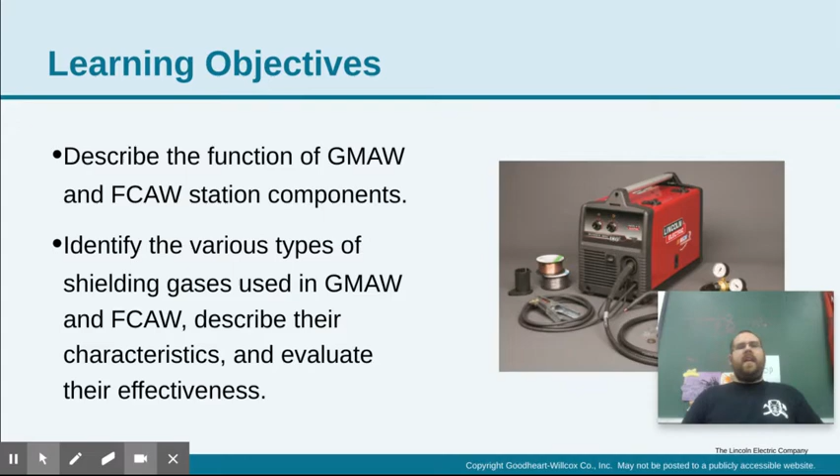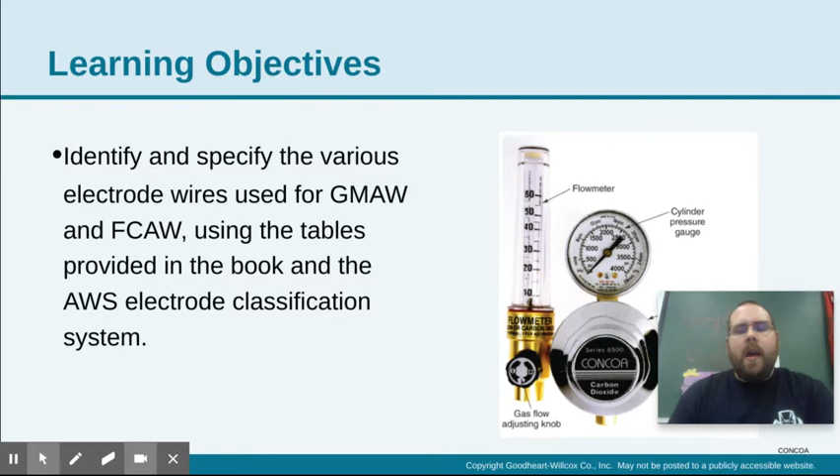Identify and specify the various electrode wires used for MIG and flux core using the tables provided in the book. It's a lot similar to stick welding, so it follows the same kind of 4-digit dash digit tables. Not really charts, but the same tables. I don't know why they have a flow meter on that page.

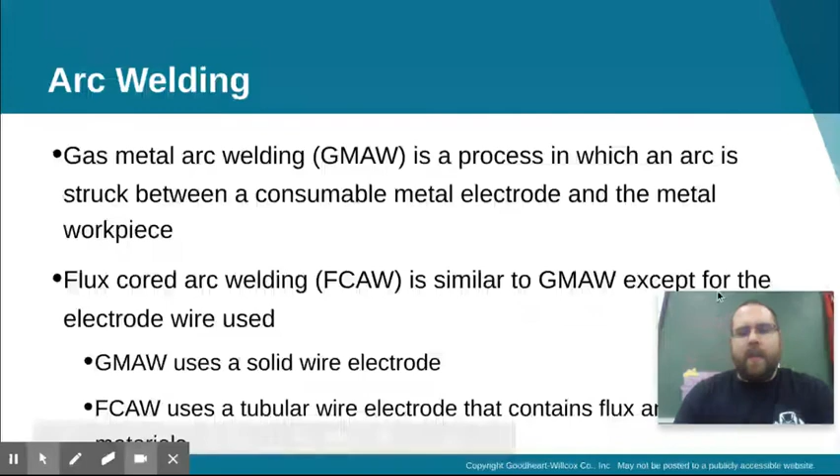Okay, so arc welding. Gas metal arc welding, or metal inert gas, MIG, is a process in which an arc is struck between a consumable metal electrode and the metal workpiece. Flux core is the same, except instead of a solid wire, the flux core wire is hollow, like a tube with flux in the middle, basically the reverse of a stick electrode. Stick electrodes have the wire on the inside, covered with flux. Flux core arc welding is the electrode with flux on the inside. I personally really like to flux core weld, that's just me. It's easy.

MIG welding and flux core both use continuously fed wires, so as soon as you strike an arc and hold down that trigger, it starts welding. The wire is the electrode. That should be pretty obvious.

Give me just one second, I don't know if I can get rid of this camera. Oh, I can kind of drag that up there. Okay, that's out of the way. Alt-T. Cool, okay, sorry, I had a bunch of pop-ups blocking my way. Come on, go away, slide. Go away, what does this do? Okay, so I can go back.

So the wire is the electrode. Flux core arc process is used to weld only ferrous metals and nickel-based alloys, so you can't do stainless steel or aluminum with flux core, and it is generally performed semi-automatically, and can also be done with a machine, usually it's just handheld but it can also be used with machine. You've got to read the book a little bit more on flux core, so it's possible, but it's harder to set it up on a robot to do it.

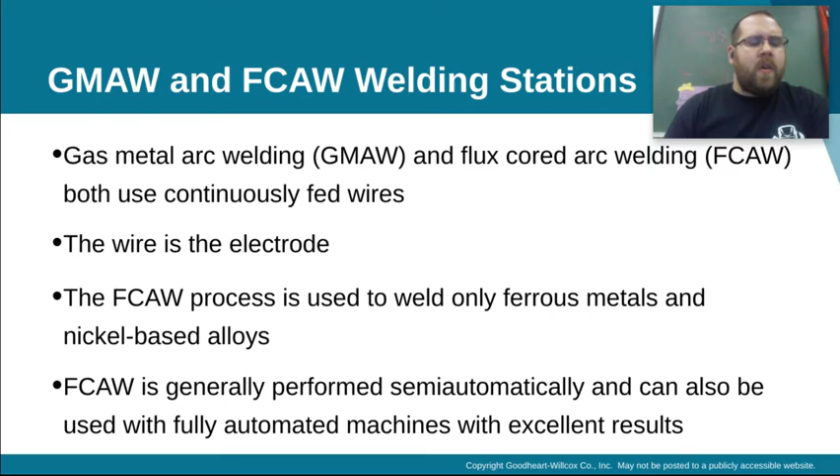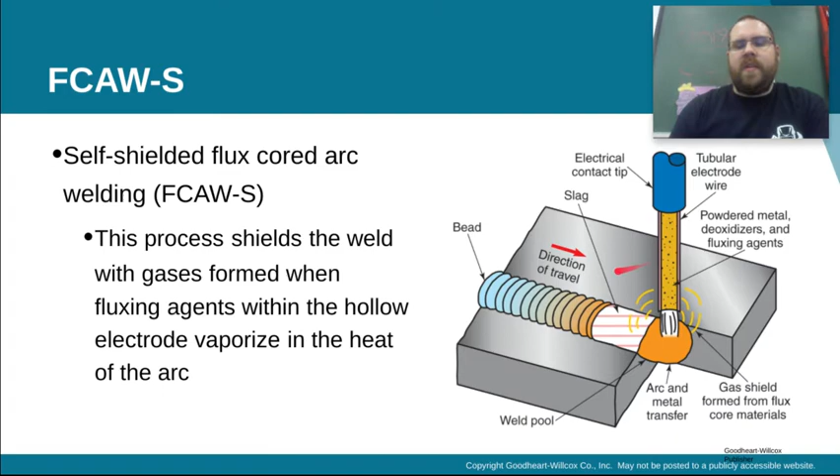Here you can kind of see a diagram of the flux core wire, so you'll have the wire on the outside and the powder flux on the inside. Granted, it's packed in there pretty tight, so it's not really a powder. This is for self-shielded, so if it's FCAW-S, that means it's self-shielded, it doesn't need a gas for it. They're a little bit nastier, a lot thicker smoke, stuff like that.

FCAW-G is for gas shielded. It's a little bit different, but it's still FluxCore.

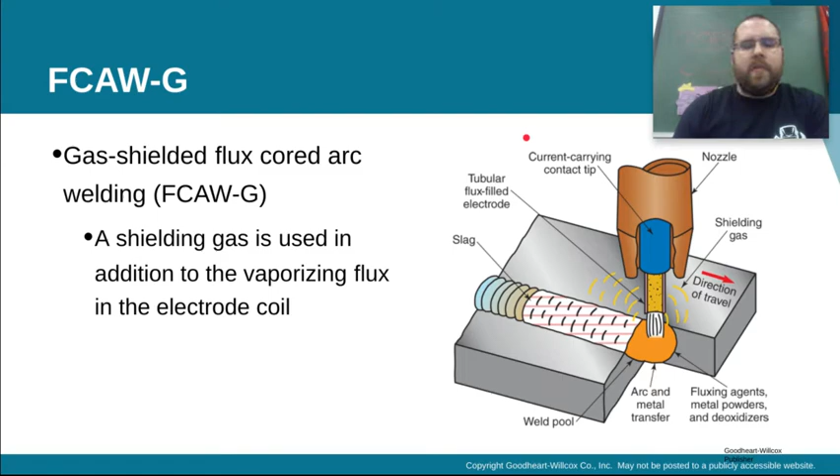The advantages for self-shielded are you can use it more outside, you don't have to carry around a bottle, and it does pretty well in out of position welding. There's higher weld spatter and higher levels of smoke, slag is much harder to remove, and it has a lower deposition rate, so you don't get as much weld in the same amount of weld area as you would with gas covered.

For the gas covered, it's used more often indoors, where you can lug around a gas bottle a little bit easier. The shielding gas keeps oxygen and nitrogen away from the weld, so you have a lot fewer weld defects like porosity, wormholes, or worm tracks. It produces a weld with good mechanical properties, so it's a little bit stronger and more suited for structural welding. It produces far less spatter, and you have a higher deposition rate, so you can put a lot more weld down a lot faster.

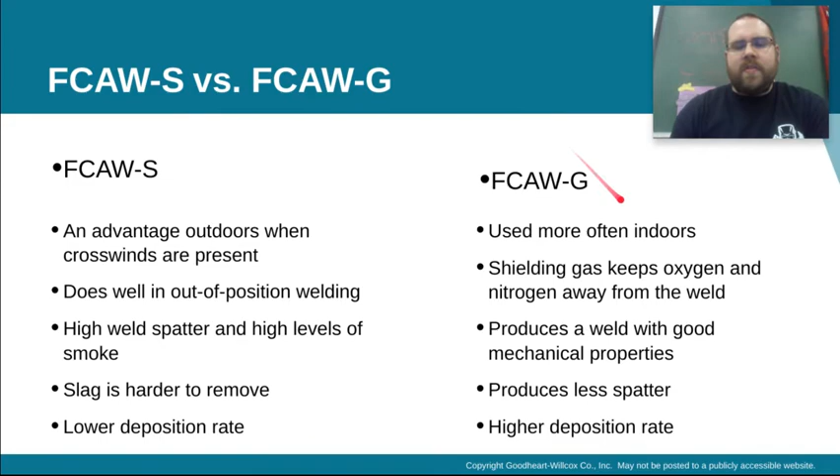I'm having a brain fart... wire rollers. I couldn't think of the rollers.

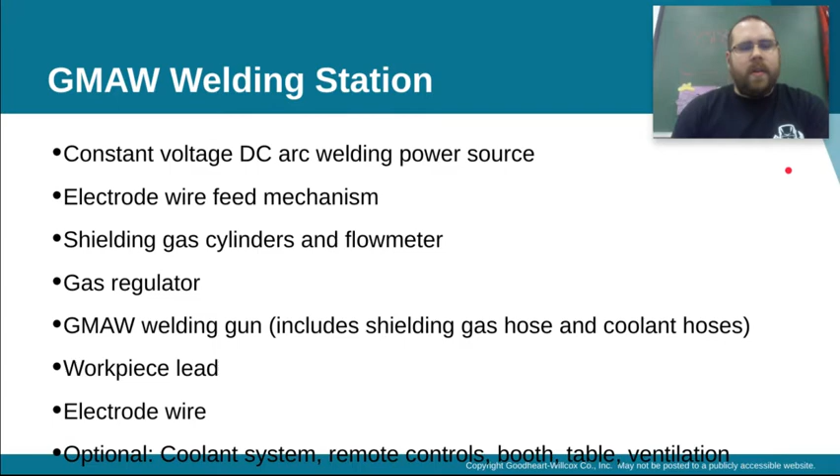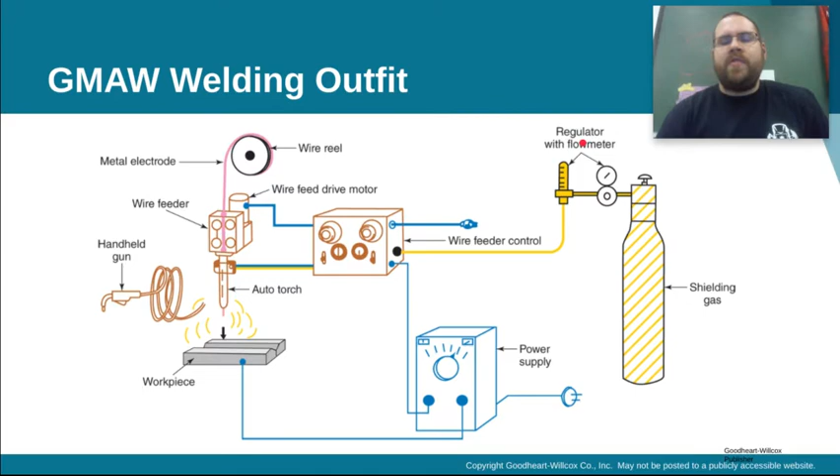You'll have a regulator and a flow meter. The regulator just sets the pressure that the gas is going in at, and the flow meter controls the volume of gas pushed through your gun. That's really important right there, it's the volume of gas flow, not the pressure that's fed out. When you're setting a flow meter, it's always measured like cubic feet per hour, or minute, I'm pretty sure it's hour. So the flow meter controls volume, and the regulator controls pressure.

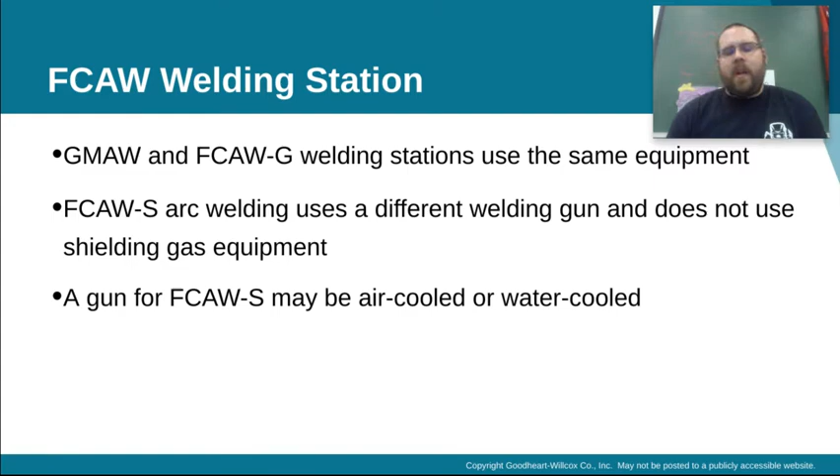That's more into the electrical side of things, which I'm not gonna lie, I don't know a whole lot about the science behind the machines. I just know how to use them. That's something I'm working with Bob, the Ivy Tech guy, to help learn more about. Usually, most places, if your machine has an issue, they bring in a maintenance guy, or they have a maintenance guy that fixes it. So I don't really know a whole lot about those machines when it comes to the electrical side of them.

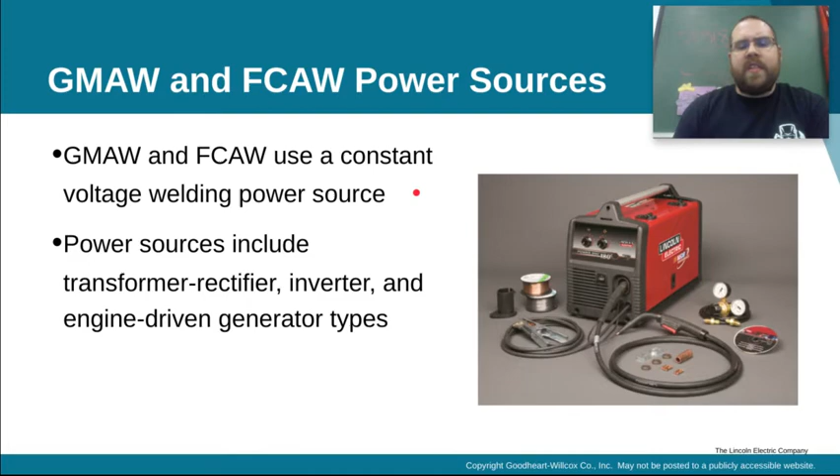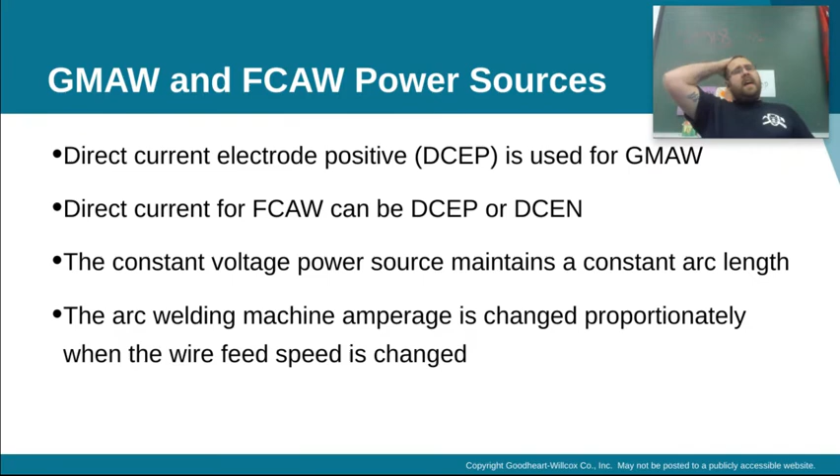Direct current electrode positive, DCEP, is used for MIG welding. Like I said in my MIG welding machine video, 90 to 99% of MIG welding and flux core is going to use direct current electrode positive. The only things I know that use something else are self-shielded flux core, which uses negative, and aluminum MIG welding, which uses AC. Off the top of my head, that's the only things I know that are different.

Spray, globular transfer, and short circuit transfer all use positive. The constant voltage power source maintains a constant arc length, so when you're welding, it keeps the same arc length all the way across.

Arc welding machine amperage is changed proportionately when the wire feed speed is changed. I actually don't know a whole lot about the amperage, but I know for 045 wire, when you're using MIG welding short circuit, 045 is a 1-to-1 ratio. So if you have your wire speed set at 275, your amperage is 275. And I think 035 wire is like 2/3 of that. I'll cover that more when we get into actual welding. I've got to look into it more, if there's a diagram or chart to use on how to find your amperage.

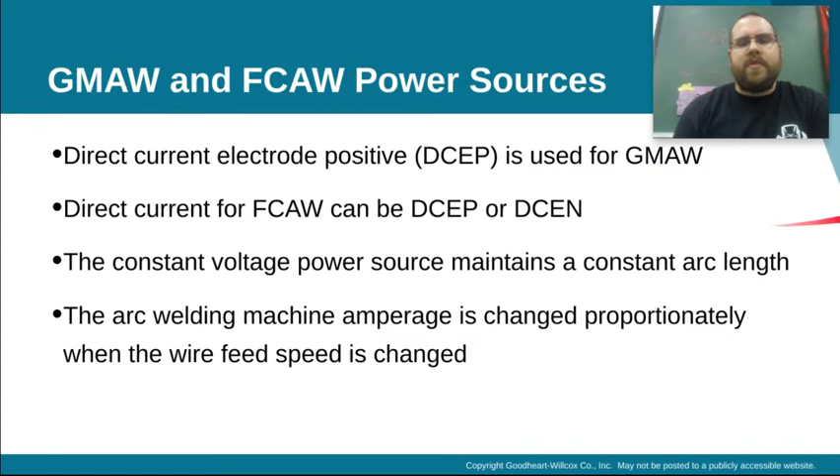For MIG welding and flux core, you'll set the volts and the wire speed, and that sets your amperage. I don't know anything more about that.

The wire electrode used in MIG welding comes in large coils or drums that contain hundreds or thousands of feet of wire. Here we'll use 44-pound spools. It takes a whole lot of welding to go through one of those spools of wire. If you're running a machine, you can get 55-gallon drums of coiled wire, so there'll be miles of wire in that drum.

Wire feeders may be contained inside the gas metal arc welding machine or separate from it. Some will have a panel that you lift up from the side, put the wire on, close the panel, and continue going. I like those a little bit better because it keeps your wire cleaner. All the machines we have here have it located on top, on the outside, so they do get a little bit dusty.

They also make these red Scotch-Brite things that you pop on your wire when it's going into your wire feeding machine that will scrub it clean. I'm trying to get some of those. I'm sure it would help with the welding a little bit better.

Wire feeds consist of the coil mounting device, a set of drive wheels for the wire, and an adjustable constant speed motor. You can kind of see it on the video again - we have the mounting device where the spool is actually mounted, the drive rollers or wheels, and what I called a tension setter, which is the adjustable constant speed motor. That's just how fast it's running or how much tension those rollers put on the wire.

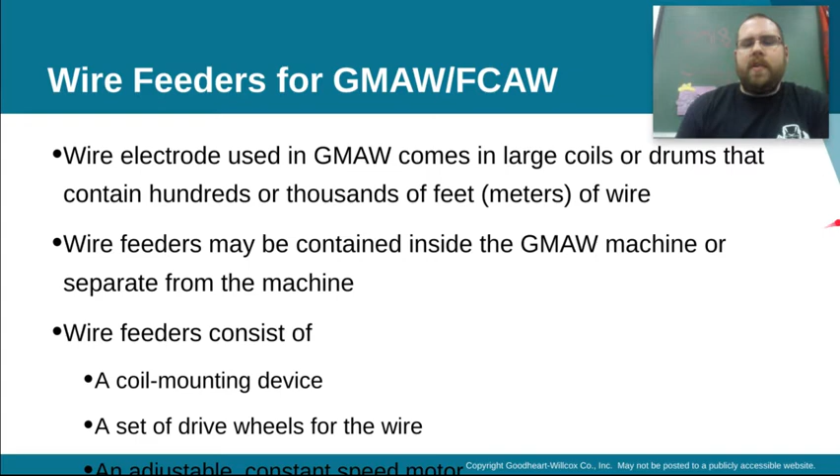Drive rollers have one of 3 groove designs: a V groove, where the groove looks like a V so it can fit a bunch of different types of wire, a knurl groove, and a U groove. I personally like the knurl grooves a little bit better. It seems to me that I've had more luck with those not bird nesting.

Drive rolls are designed to work with a specific electrode diameter. So here you can see it says 045 - those would be for an 045 wire, and you can see an 045 there too. So you just have to pay attention to your wire size and your roller sizes. If you put 035 wire in here, it wouldn't move it at all - it'd be too small.

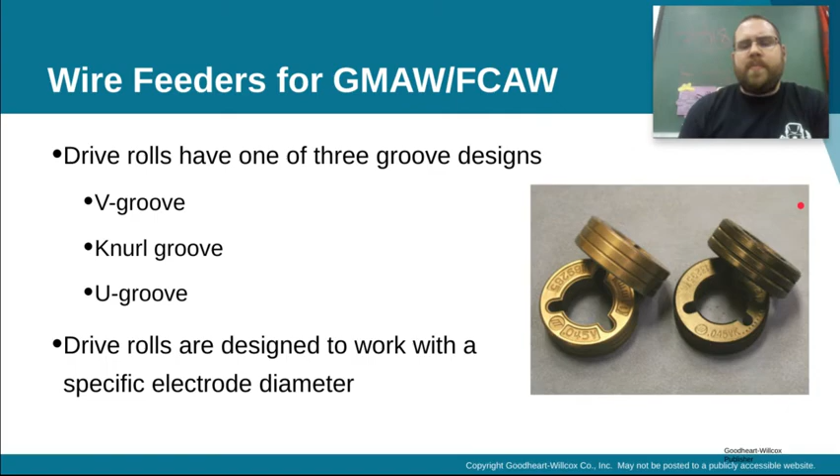Here you can see the typical roller setup. You have your electrode spool hub, that's where you put the wire. Then you feed it through here, through your drive rollers, through here, into your gun.

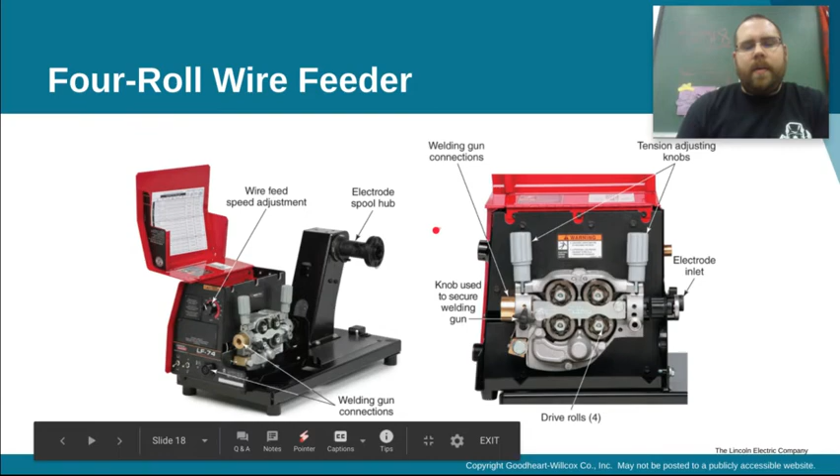Here you have tension adjusting knobs, inch switch, and purge switch. The inch switch or jog switch - I'm going to call it jog switch because Miller just has jog - on the wire drive control panel is used to rotate the drive motor slowly. When you hold down the jog button, you can set your wire speed to whatever you want. So if you need it to go a little bit slower, you can do that, or if you're trying to add new wire to the system, you can crank it up and it'll shoot out of there really quick.

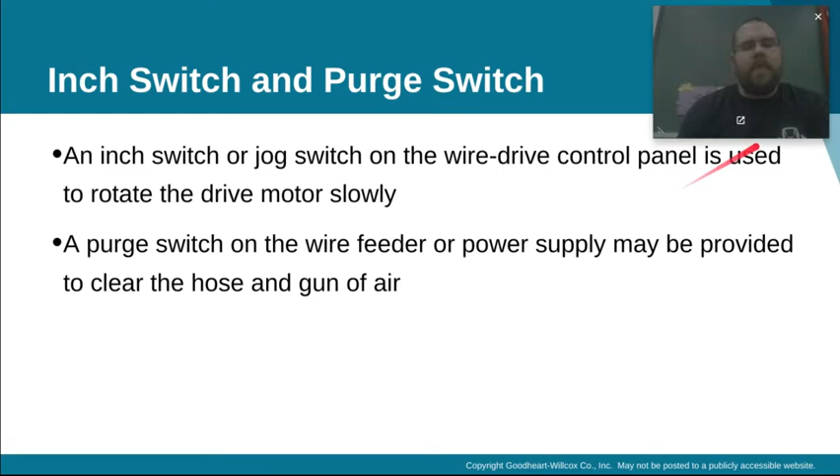Purge switch on the wire feeder or power supply may be provided to clear the hose and gun of air. You can also use that to flush out a previous gas that you were using. So if you are using 100% CO2 on one job and then you switch to a 75-25 argon CO2 mix, you can purge the 100% CO2 out. Or most commonly, it's going to be used to just set your flow meter so that you don't have to hold down your trigger on your MIG gun.

Shielding gases used with MIG can be inert, reactive, or mixtures of both types. Inert gases don't react with other chemicals or elements. Argon and helium are both inert gases.

Oh, that kind of sucks. It cut one off. Reactive gases react with other chemicals. That's going to be like your CO2.

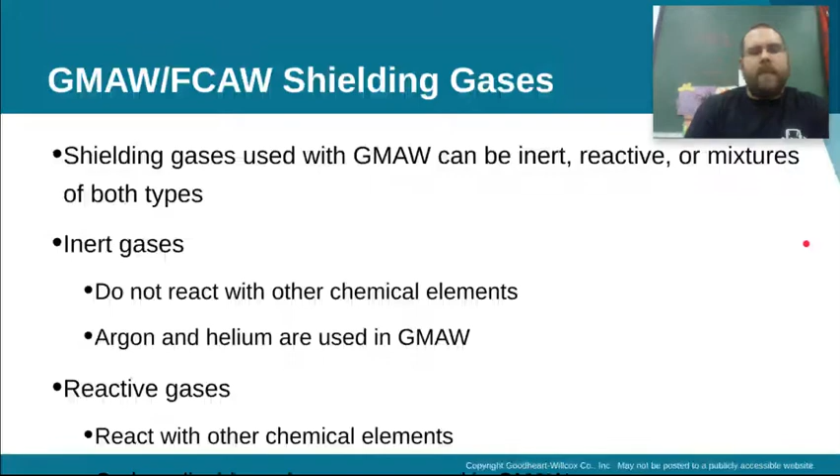I don't know what else it says down there. Gas mixtures or 100% carbon dioxide are used to weld steels. CO2 is carbon dioxide. Pure argon is used to weld most non-ferrous metals, so like your aluminum, Hastelloy X, Inconel. Hydrogen and nitrogen are used in specialized applications.

I've never once used any of those. The gas or gas mixture selected is determined by the metal and the arc transfer method desired.

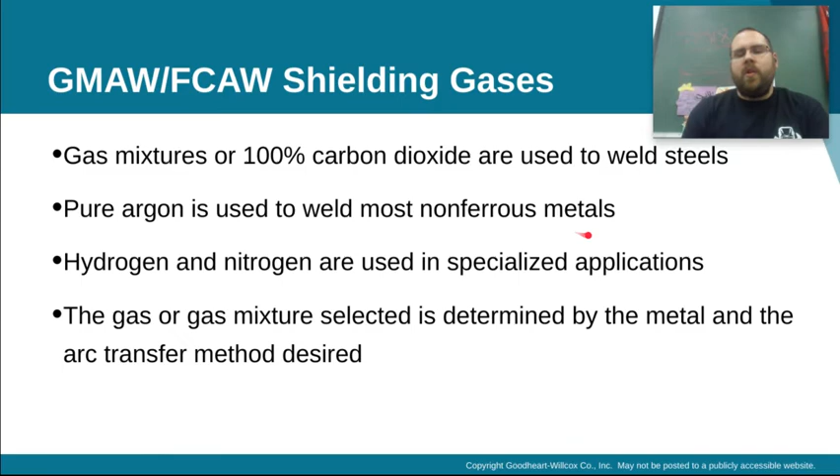Cylinders are available in a bunch of different sizes, and they are manufactured to Interstate Commerce Commission specifications. Some gases are stored as liquids. The quantity of gas in a cylinder is determined by the high pressure gauge or volume scale if stored as a gas, and the weight if stored as a liquid.

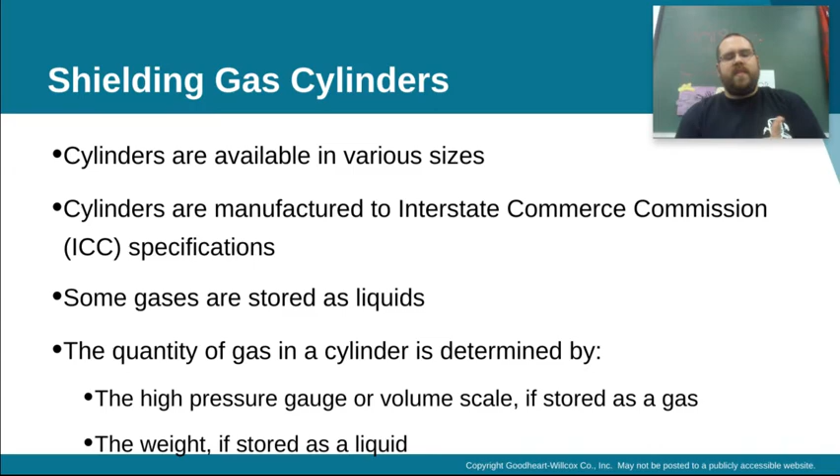Safety tip: thread the cap securely over the cylinder whenever cylinders are moved or in storage. So if a cylinder doesn't have a cap on, it has to have a regulator on, and if it doesn't have a regulator on it, it has to have a cap, okay.

A cylinder truck is recommended for moving cylinders, a little dolly or cart. Fasten cylinders to wall or stable objects when in use. That is super important. Never ever leave just a cylinder sitting in an aisleway or out in the shop or anywhere unsecured. Always store and use gas cylinders in the upright position.

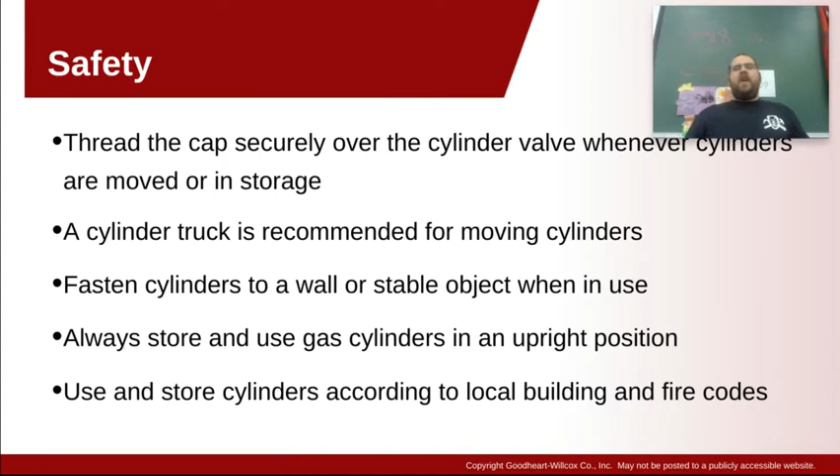You can't lay it on its side. It messes with the pressure. Use and store cylinders according to local building and fire codes. So you don't want to leave your oxygen and your acetylene together, making a big bomb.

Regulators control the rate at which gas is expelled from the cylinder. So here you have a regulator. This is going to be done with pressure, and this is going to be done with, this is your flow meter. This is going to be cubic feet per hour or something like that.

CFH, yeah. This is by volume, this is by pressure. Flow meter scales are accurate only if gas entering them is about 50 psi. So once a bottle gets down to less than 50, it's kind of hard to tell. The flow meters aren't really worth much.

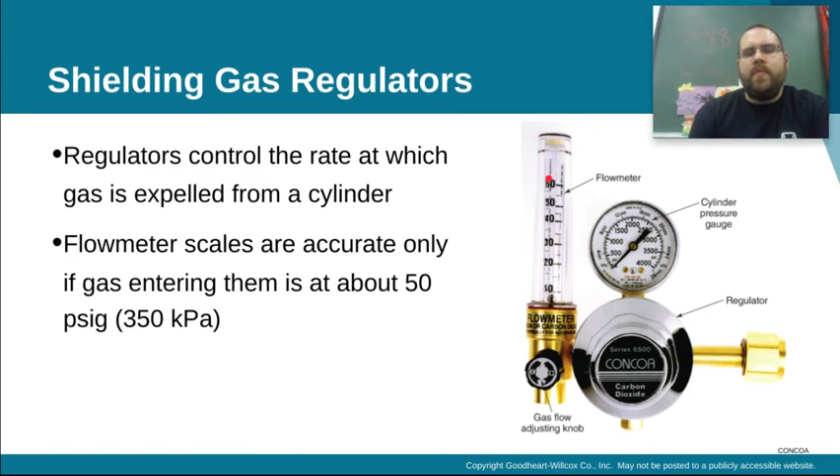Flow meters measure the rate of gas flow. The volume of the gas coming out of the nozzle is measured, and different flow meters or different scales must be used for each gas. So here you can see, this is for carbon dioxide. Most of them will have like an argon-CO2 side, and then some will have like an argon-helium side. You just have to pay attention to that and use the right scale.

Carbon dioxide is only used on carbon steels and low alloy steels, and carbon dioxide reacts with and oxidizes the base metal. Moisture-free carbon dioxide must be used. Maintaining the proper arc length is critical. Carbon dioxide is the least expensive shielding gas.

Carbon dioxide, 100% CO2 is what we use. It makes the arc just a little bit more harsh, and you'll get a little bit better penetration, but it's cheap. So I'd probably say most places use a 75-25 mix, so 75% argon, 25% CO2.

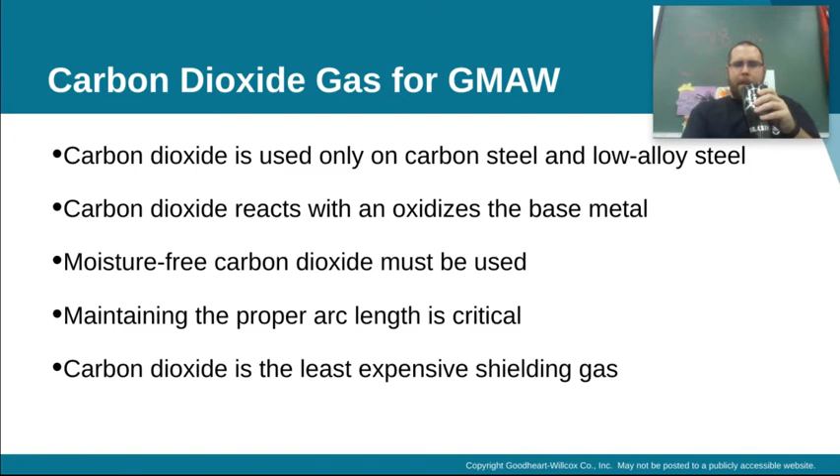Gas mixtures for MIG welding overcome the tendency for filler metal not to flow to the edges of the weld. A gas mixture is used. For steels, oxygen or carbon dioxide is added to argon. If you add oxygen, it makes it a little bit hotter. It's going to help you get into the spray transfers. And CO2 is just to help, and I think it cools it down just a little bit.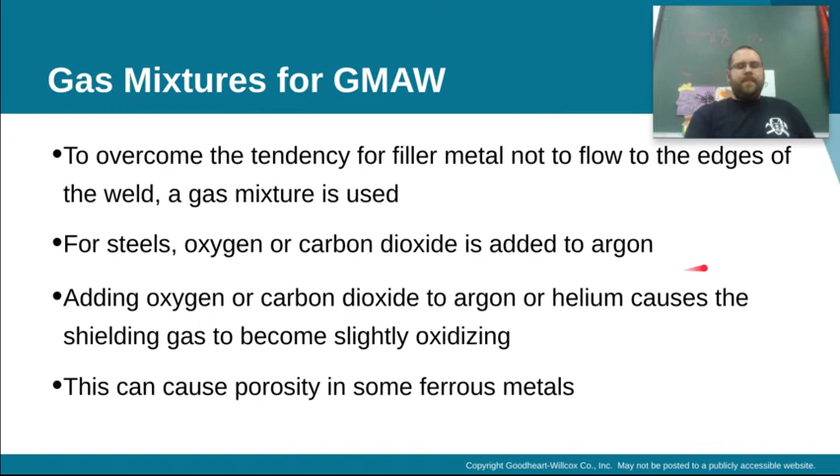Adding oxygen or carbon dioxide to argon or helium causes the shielding gas to become slightly oxidizing. This can cause porosity in some ferrous metals.

Argon and helium are generally used with non-ferrous metals. Helium is used when high heat input is required in a welding application. Argon is heavier than helium and provides a better shield. Argon is often used for out-of-position welding because of its lower heat conductivity, and argon costs less than helium. Helium is super expensive.

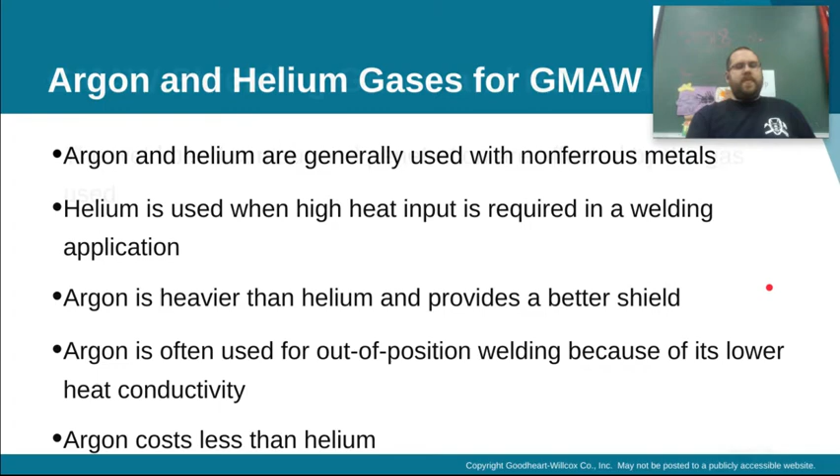The weld bead contour and penetration are affected by the gas used. So here you can see argon, you're getting a little bit of penetration with a little bit of undercut. Here you can see the undercut.

Argon and oxygen, or argon and CO2, you get better penetration and no undercut. With helium, you have a fatter, flatter bead. Argon and helium, so it's still a little bit flatter, and you get a lot of penetration. And then with carbon dioxide, you get a whole bunch of penetration, but it causes the weld to spatter a lot more.

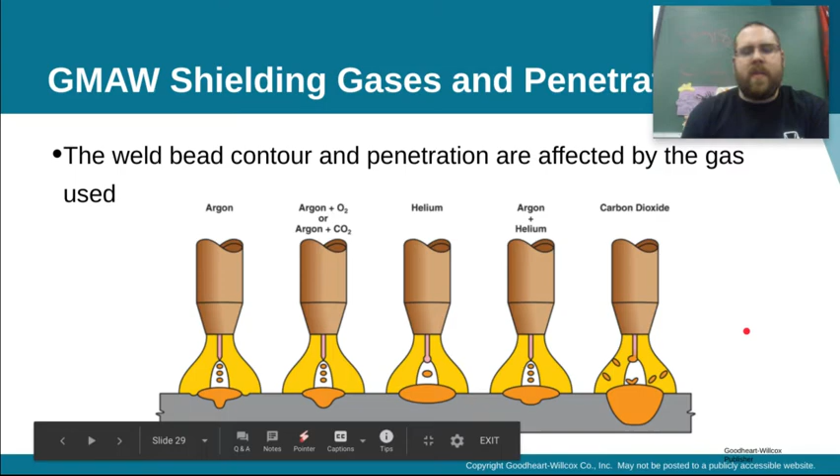Shielding gases for flux core. The self-shielded does not use an externally supplied shielding gas. That's what the flux is for. Most common shielding gas for gas shielded flux core is carbon dioxide, and gas mixtures are also used. The proper combination of shielding gas and electrode is required. So when we get into the wire classifications, that'll tell you a lot on the gas that's needed.

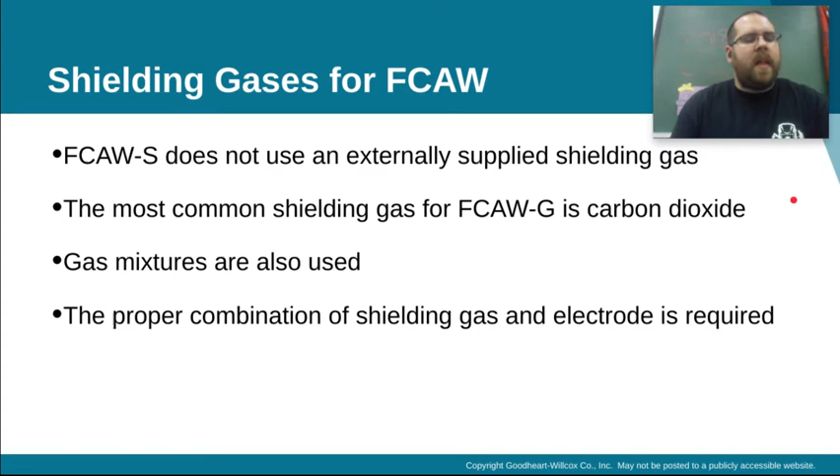So a MIG gun, here you have a typical MIG gun. The welding gun directs the welding electrode into the weld. The gas hose, electrode lead, and liner are built into one large cable. And some air-cooled guns have a power pin connection. So here you have this is what plugs into your wire feeding system, and those O-rings are what prevent your gas from leaving the gun and going into the gun and around your cable and out your nozzle.

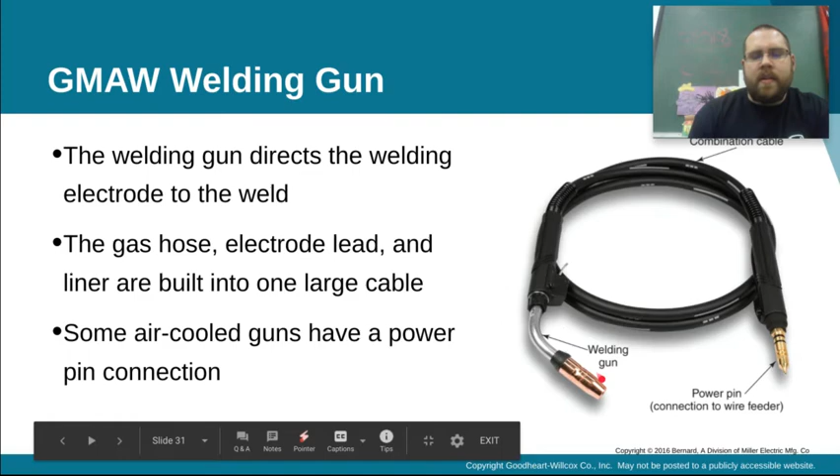MIG guns are usually air-cooled. Water-cooled guns are required for continuous welding or welding at amperages above 300 amps with argon shielding gas. Spool guns have self-contained wire drive units. Pull-type gun has a motor and drive rolls in it, which pull the electrode wire.

In the MIG machine video, I briefly showed you a push pull gun on the aluminum welder we have out there. In push pull systems, the welding gun pulls the wire while the wire drive at the power source pushes the wire, so it just helps it move at the same rate. Aluminum wire is really easy to kink, and it'll kink inside your lead, so it's easier just to have it pushed and pulled.

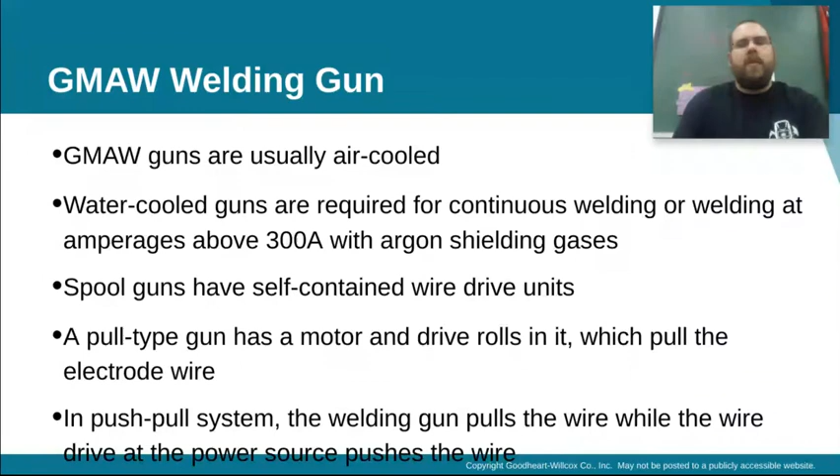Welding guns for automatic gas metal arc welding: straight neck and nozzle, no handle or trigger, attached to a carriage or other mechanism for welding. Welding guns for robotic MIG welding: bent neck attached to a robot.

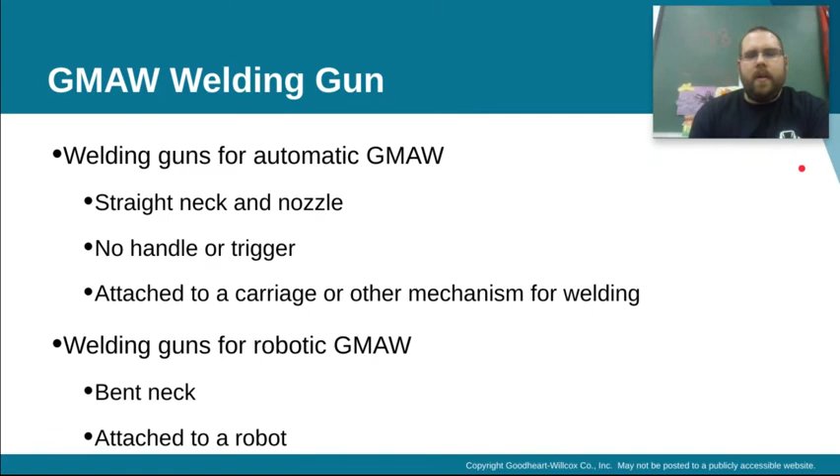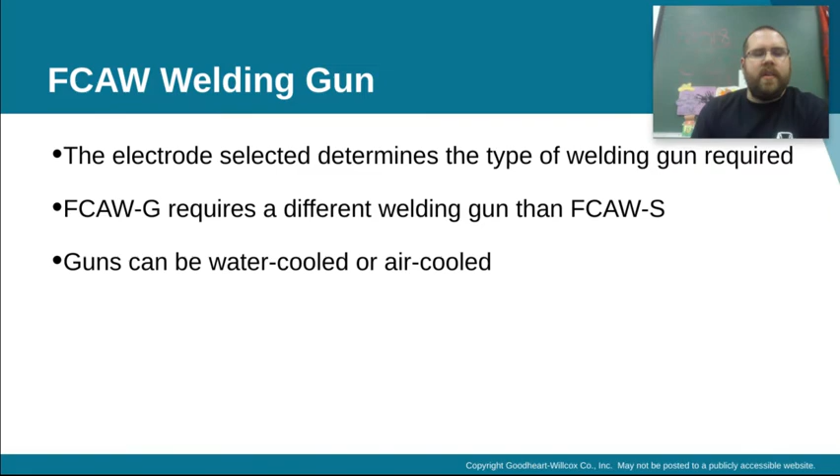The electrode selected determines the type of welding gun required. Gas-shielded flux core requires a different welding gun than self-shielded, and guns can be water-cooled or air-cooled. So it's pretty much the same.

A contact tip transfers electrical current from the welding gun to the electrode wire. So you have to make sure that you have the right tip for the right wire that you have. So like if this is an 045 tip and you try to run 035 wire through it, it's not going to work very well because it's not making the contact that it needs to. So your amperage and your voltage is going to be off.

A contact tube threads into a contact tube adapter or diffuser. The adapter threads into the welding gun. Most of them have an insulator just to make sure you don't shock yourself if you're touching it.

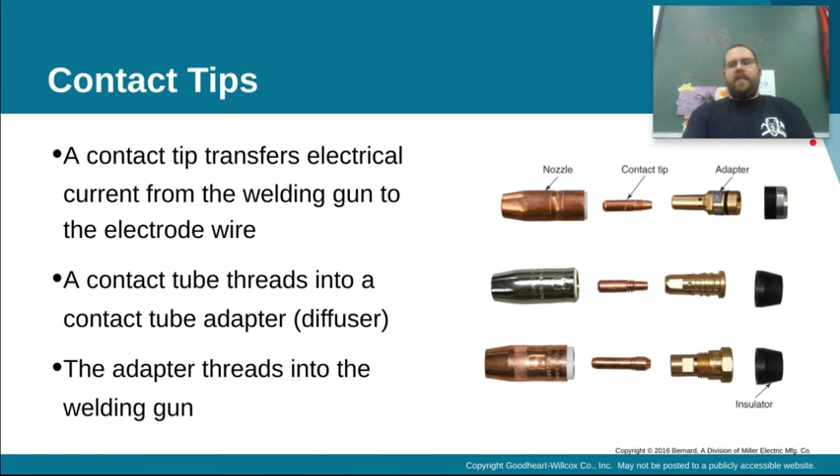Nozzle fits on the end of a gun and directs the shielding gas into the weld area. You'll see some MIG guns have a real tight nozzle, and then some have a big nozzle. That just depends on the gas and the type of welding that you're doing. Nozzle designs vary, and exit diameters are measured in 1/16 of an inch increments.

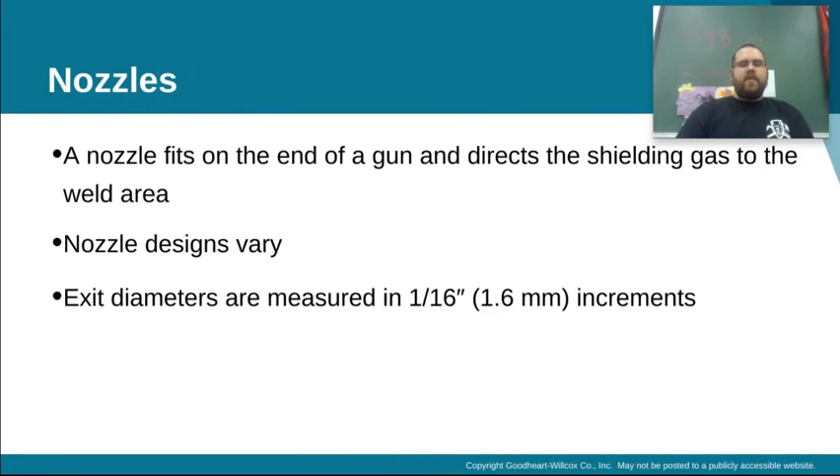Liners. So a liner, it's going to look like a giant, tightly wound spring that goes all the way through your gun. It's what keeps your wire from kinking. The liner is installed in the cable that carries the electrode from the wire feeder to the welding gun. For most applications, a coiled steel wire liner is used. A nylon liner is used with aluminum electrode wire. That just helps keep your wire from getting contaminated by the coiled steel wire.

A lot of talking. Oh look, I'm on 37 and 55, so we're almost done.

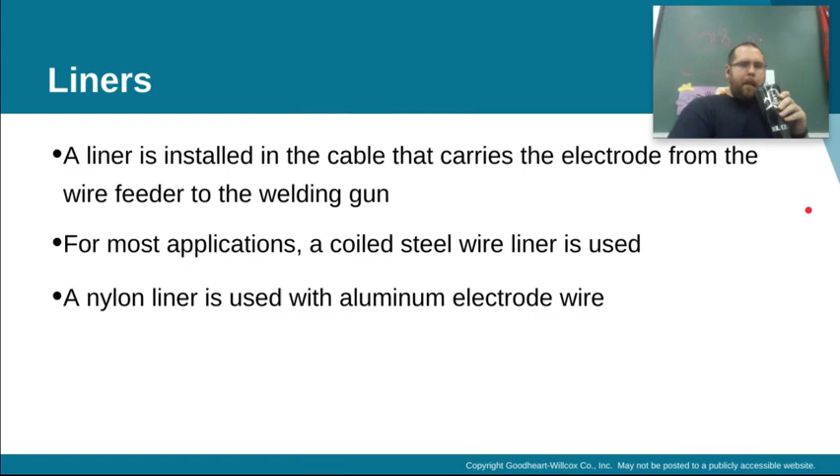Some accessories: welding pliers, welpers—I'm going to call them welpers as a brand—are useful tools. Function as wire cutter and needle-nose pliers. You'll see, well, you can't really see on this side. On this other side, this other side will be kind of like a file. It helps clean debris and spatter out of your nozzle.

Many arc welding machines have a remote control circuit switch and external plug. Don't know what that is. Remote adjusters are used to adjust wire feed speed or voltage.

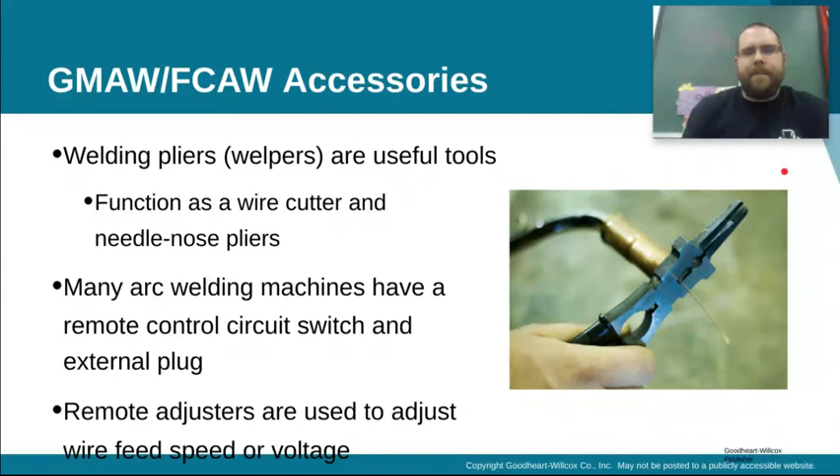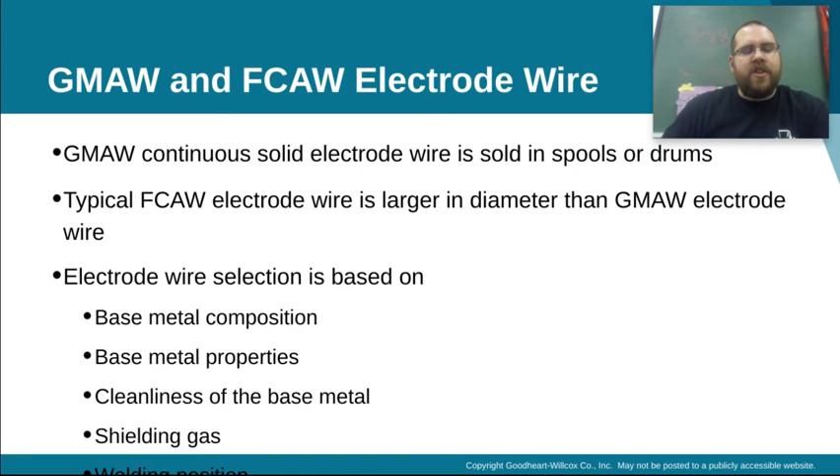Electrode wire selection is based on base metal composition, base metal properties, cleanliness of base metal, shielding gas, and welding position.

MIG electrode wire is usually continuously solid. Electrode wire, metal cored wire, is a second type. Metal cored is pretty new, I've never used it, and I don't quite understand what it is.

The AWS has an identification system for MIG electrode wires. Aluminum is going to be ER4043 or ER5356. Low carbon steels are ER70S-2 or -6. I think we use the -2 here.

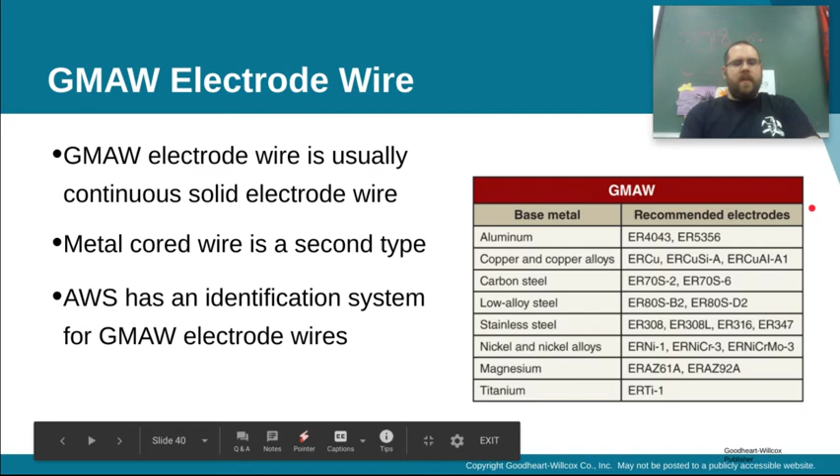Stainless steels, you've got your ER308s, 308Ls, 316, 347s. The rest of that is like super specific, or based on what you'll need it for.

I pay close attention to this slide too. So for electrode rod, the 70 is the minimum tensile strength, just like in stick welding. The S tells you if it's solid or cored, and the 6 is the chemical composition of it.

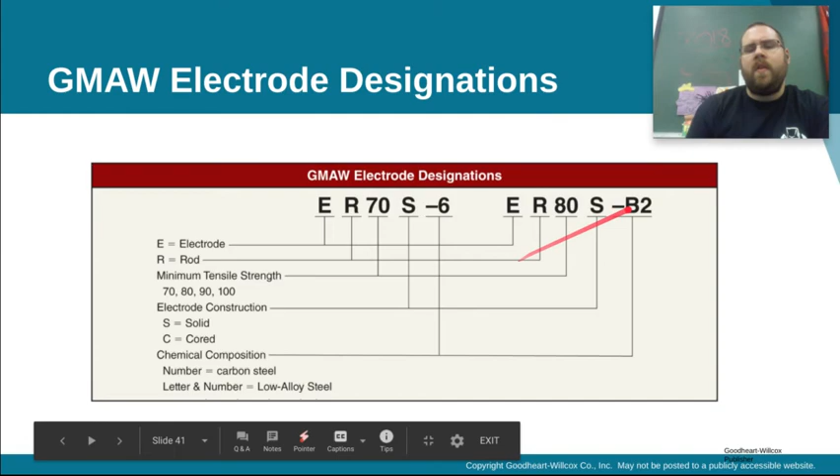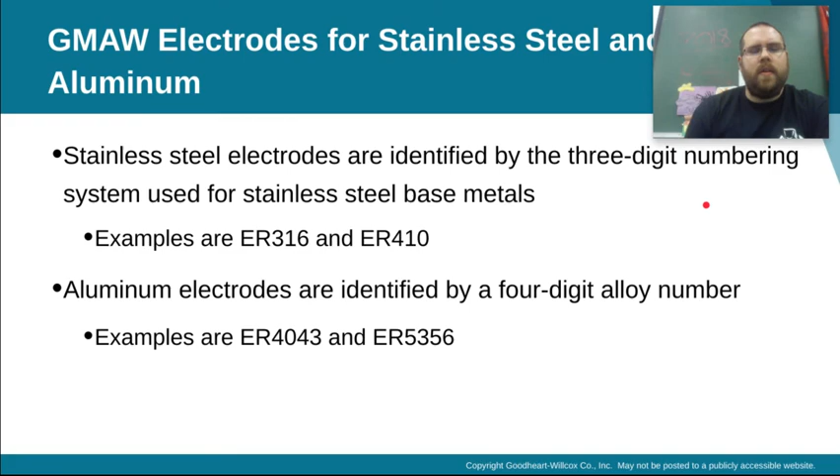Letter number, low alloy steels. That's going to show you, if you're using it on low alloy steel, what to use it on. Don't need to know that, we're not going to cover that yet.

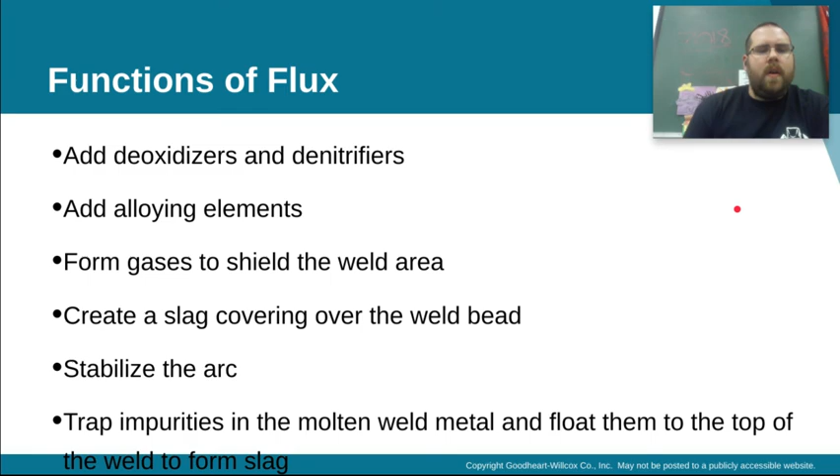The classification is pretty much the same as MIG wire. So you have E for electrode, 70,000 pounds minimum tensile strength, T for tubular, and -1. The -1 tells you what kind of wire it is, or the chemical composition of the flux.

I know -11 is for self-shielded. I think we use E70T-1 for gas shielded and E71T-11 for self-shielded. Yeah.

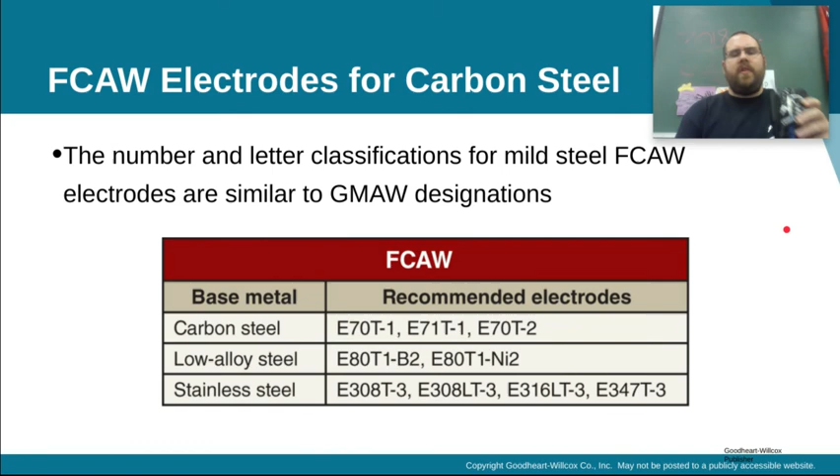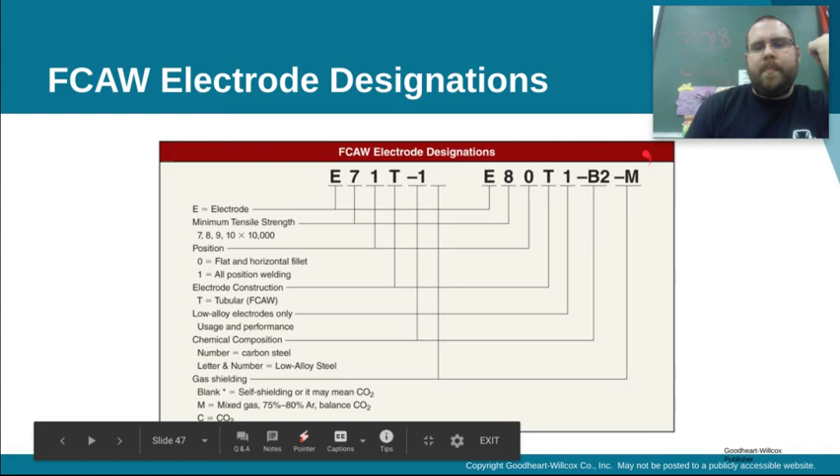Here we have the 70, the same thing for the electrode designations: electrode, minimum tensile strength, position, electrode construction, so tubular. And then all of that information, you don't hardly ever see that actually on any wire. That's getting really specific.

Dash numbers indicate the following: electrode polarity, if shielding gas is required, and the number of weld passes recommended. The shielding gas to be used can be indicated by the letter in the final position.

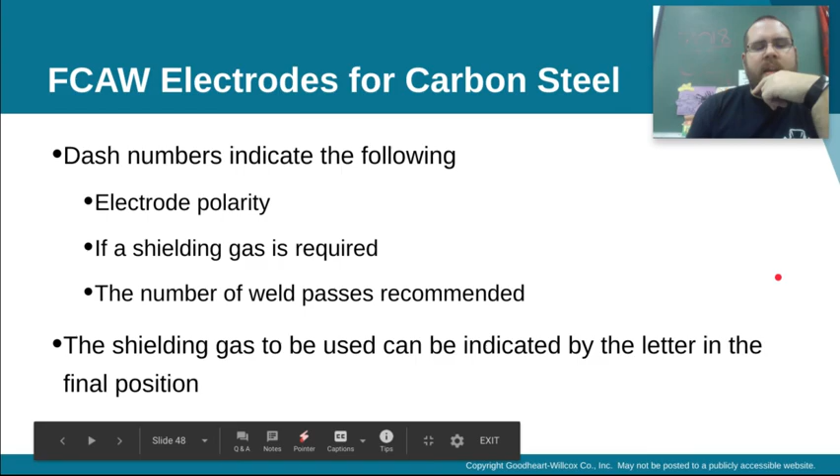We're going to talk about stainless steel. I'm not going to talk about smoke extracting systems, because we did that already. Filter lenses for gas shielded arc welding.

Because of the clearer atmosphere of the arc, the operator must use arc welding lenses with a darker shade. This will reduce eye fatigue and prevent possible eye damage. Most helmets for gas arc welding use a clear cover lens and a filter plate. Keep lenses clean.

If I'm flux coring, I usually use a 12 or 13 shade lens on my welding hood. It's a lot brighter, so your eyes get tired a lot faster.

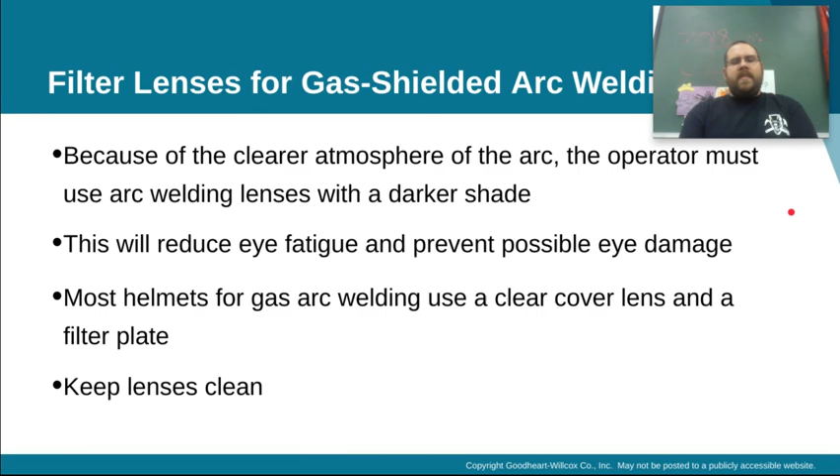Protective clothing is going to be the same as stick welding. Leather clothing provides the best protection. Heavy wool or cotton can also be worn. Dark clothing reduces the reflection of light behind the helmet. So if you're wearing a black t-shirt, the light's not going to hit your chest and bounce up into your hood and blind you.

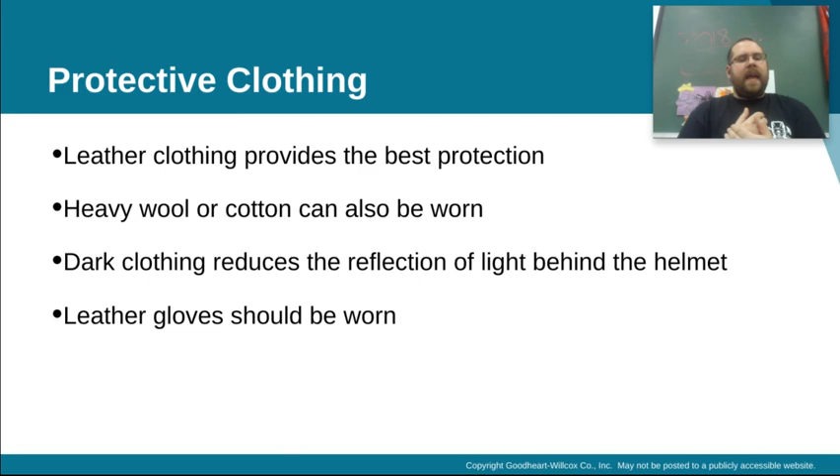Leather gloves should also be worn, especially with flux core. Flux core is hot, hot, hot. They actually make a thing to put over your glove called the hot hand, a reflective cover that helps reduce the heat on the back of your hand because it's so hot.